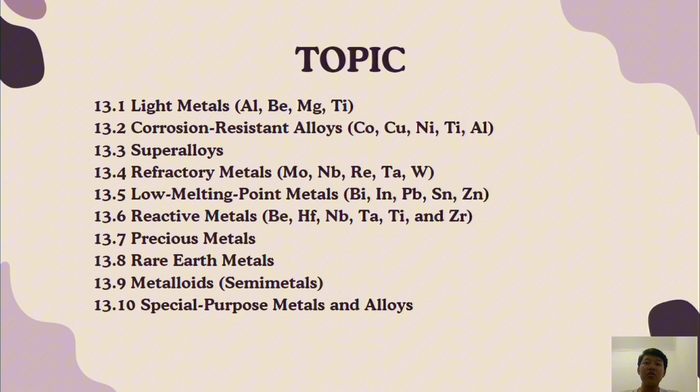Non-ferrous metals, a variety of possibilities. Compared with their steel counterparts, non-ferrous metals and alloys are notable in their number and in the diversity of their properties. Many non-ferrous elements do double duty as important alloying agents for both steel and non-ferrous metals.

For example, virtually all steel contains small amounts of manganese, which is used mainly to control, and in some cases counteract, the undesirable effect of sulfur and to aid in achieving hardenability requirements. Other alloying applications of manganese include specialty non-ferrous alloys such as manganese copper and manganese-containing brass, bronze, and

some nickel silver. Pure manganese by itself is too brittle for structural application. It oxidizes easily and rusts rapidly in moist air.

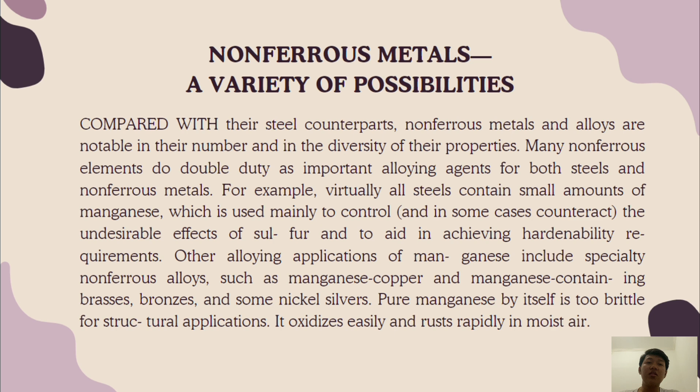1. Light metals. High strength lightweight alloys are of great importance in engineering applications for use in land, sea, air, and space transportation. 1 kg or 2.2 lb of metal saved in the design or construction of such a system can result in important weight savings in power plants, transmission systems, and in total fuel requirements. There is a strong demand for high strength lightweight metals and alloys.

The metals commonly classed as light metals are those whose density is less than the density of steel, or 7.8 grams per cubic centimeter, or 0.282 lb per cubic inch, and whose properties meet the requirements for specialized engineering applications. The density and elastic modulus of 4 important metals in the group are listed in table 13.1.

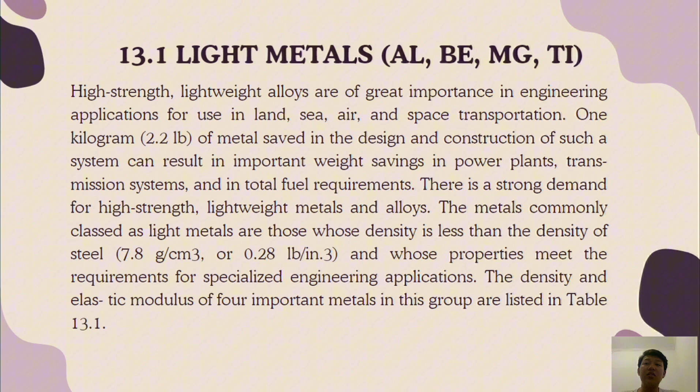2. Corrosion resistant alloys. Non-ferrous metals and alloys are widely used in corrosive environments. At one end of the spectrum, they are used for water piping and food preparation. At the other end, they are vital to the operation of many chemical plants dealing with aggressive acids and

alkalis. There are two main reasons why non-ferrous materials are preferred over steel and stainless steel for many of these applications. There are a wide variety of non-ferrous metals and alloys that are well suited to this type of application due to their favorable physical and mechanical properties. For example, a high strength to weight ratio or high thermal and electrical conductivity may provide a distinct benefit over

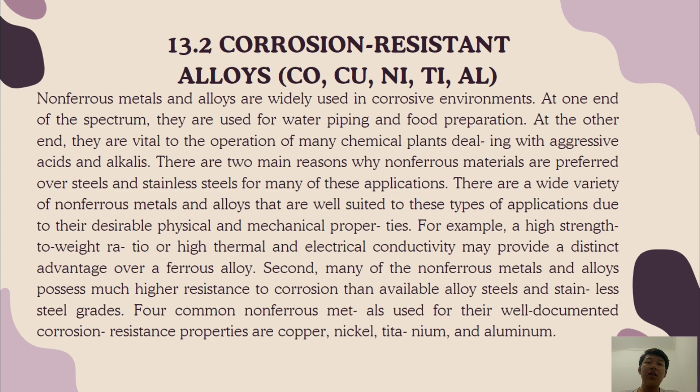a ferrous alloy. Second, many of the non-ferrous metals and alloys possess much more inherent resistance to corrosion than available alloy steel and stainless steel grades. Common non-ferrous metals used for their well-documented corrosion-resistant properties are copper, nickel, titanium, and aluminum.

3. Superalloys. Superalloys are a group of nickel-based, cobalt-based, and iron-nickel-based alloys that exhibit outstanding strength and surface stability at temperatures up to 85% of their melting point, expressed in degrees Kelvin, or 0.85 Tm in Kelvin. The iron-nickel-based superalloys are an extension of stainless steel technology and

generally are wrought, whereas cobalt-based and nickel-based superalloys may be wrought or cast, depending on the application or composition. Cast single crystal forms are often produced for aircraft applications. Superalloys are intended to prevent or minimize creep deformation at high temperature, as in Fig. 13.5.

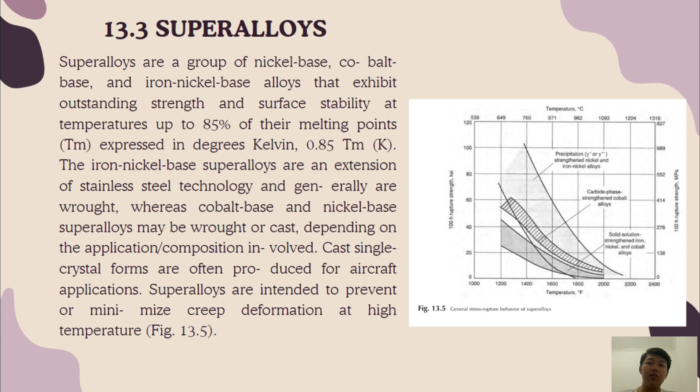4. Refractory metals. Molybdenum has a relatively high melting temperature of 2610 degrees Celsius, along with a high modulus, good creep strength, and the retention of mechanical properties at high temperature. Molybdenum is primarily used as an alloying addition in iron, steel, superalloys, and corrosion-resistant alloys to improve hardenability, toughness, abrasion resistance, strength, and resistance to creep at elevated temperature.

Niobium. In addition to its high melting point, niobium is used for its combination of relatively light weight and retention of its strength at service temperatures ranging from 980 to 1205 degrees Celsius. Niobium alloys are also used to impede the path of neutrons in nuclear applications.

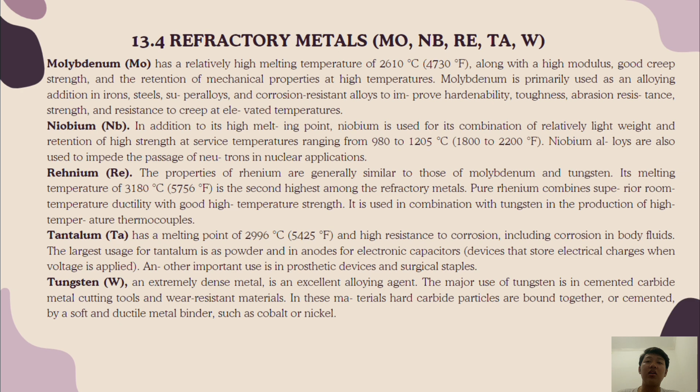Tungsten, an extremely dense metal, is an excellent alloying agent. The major use of tungsten is in carbide metal cutting tools and wear-resistant materials. In the material, hard carbide particles are bound together or cemented by a soft and ductile metal binder such as cobalt or nickel.

5. Low melting point metals. Bismuth is brittle, easy to cast, and not readily formed by standard working methods. Its melting point is lower than that of tin-lead solder at 183 degrees Celsius. Bismuth is one of the few metals to increase in volume upon solidification. It is diamagnetic, or slightly repelled by magnetic fields, and has a low capture cross section for thermal neutrons.

2. Indium is one of the softest metals, easily scratched and highly plastic, and it can be deformed in compression almost without limit. It melts at 156.2 degrees Celsius, has low tensile strength and hardness, and is stable in dry air at room temperature. It is neither toxic nor a skin irritant.

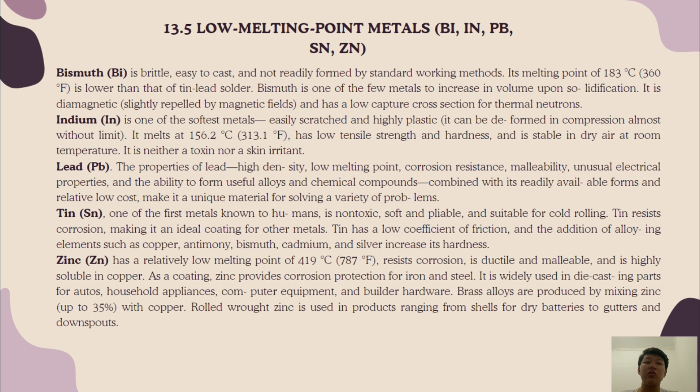Brass alloys are produced by mixing zinc, up to 35%, with copper. Rolled zinc is used in products ranging from shells for dry batteries to gutters and downspouts.

6. Reactive metals. Reactive metals readily combine with oxygen at elevated temperature to form very stable oxides. Reactive metals are extremely noble because of their passive films. However, they may become embrittled by the interstitial absorption of oxygen, hydrogen, and nitrogen. Hydrofluoric acid rapidly attacks reactive metals such as niobium, tantalum, zirconium, and titanium, either as pure or alloyed metals, and reactive metals present in stainless or nickel alloys reduce their corrosion resistance to hydrofluoric acid.

Beryllium, titanium, niobium, tantalum, hafnium, and zirconium are considered reactive metals. Of these metals, beryllium and titanium are low density metals and are often used for alloys in light structural applications. As previously noted, niobium and tantalum have high melting points and are also classified as refractory metals.

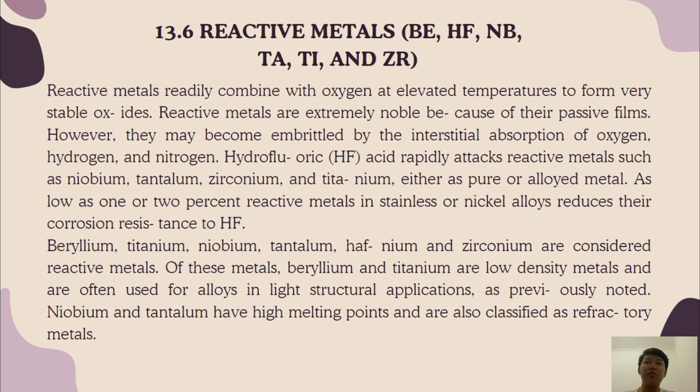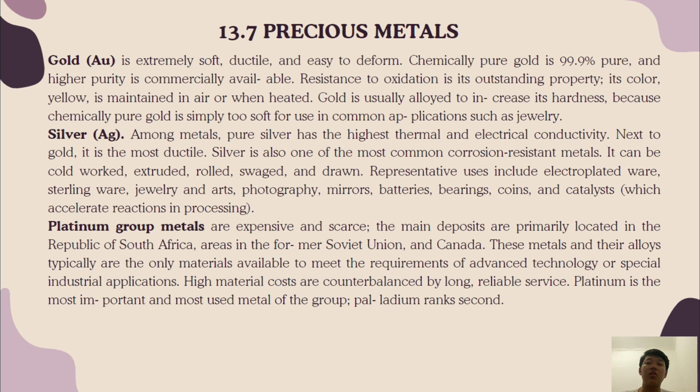Platinum group metals are expensive and scarce. The main deposits are primarily located in the Republic of South Africa, areas in the former Soviet Union, and Canada. These metals and their alloys typically are the only materials available to meet the requirements of advanced technology or special industrial applications. High material costs are counterbalanced by long, reliable service. Platinum is the most important and most used metal of the group. Palladium ranks second.

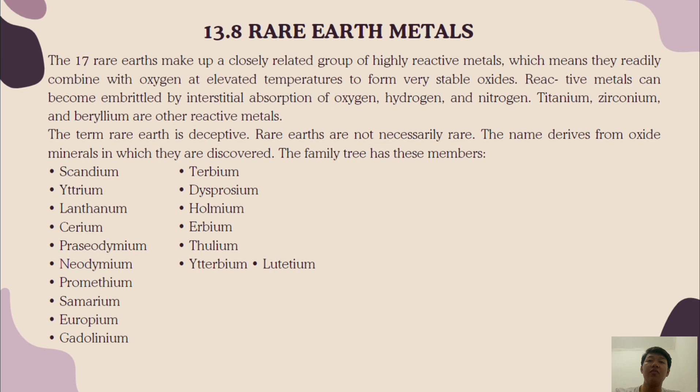The family has these members: 1. Scandium, 2. Yttrium, 3. Lanthanum, 4. Cerium, 5. Praseodymium, 6. Neodymium, 7. Promethium, 8. Samarium, 9. Europium, 10. Gadolinium, 11. Terbium, 12. Dysprosium, 13. Holmium, 14. Erbium, 15. Thulium, 16. Ytterbium, and 17. Lutetium.

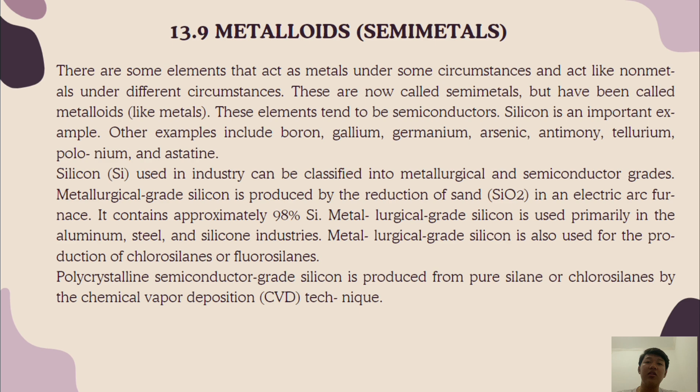Silicon used in industry can be classified into metallurgical and semiconductor grades. Metallurgical grade silicon is produced by the reduction of silica in an electric arc furnace. It contains approximately 98% silicon. Metallurgical grade silicon is used primarily in the aluminum, steel, and silicone industries. Metallurgical grade silicon is also used for the production of chlorosilanes or fluorosilanes. Polycrystalline semiconductor grade silicon is produced from pure silane or chlorosilane by the chemical vapor deposition, or CVD, technique.